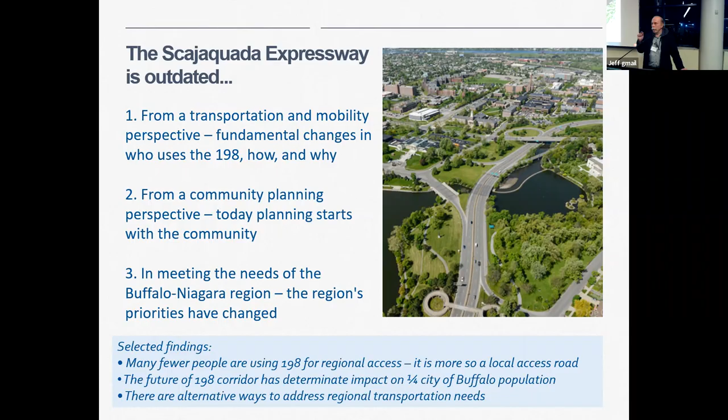And one of the things that Hal did—wherever Hal deserves a lot of credit for, I don't know if he claims it—but he's the one who came up with the idea that instead of looking at Buffalo as a region to develop the context for this planning, let's look at the area, the people impacted by the expressway, and use that as the primary focus site area for planning, and hence the invention of Region Central, which I promise none of you had heard of before Hal invented it, because it wasn't a term.

And he literally said, this is the place that should make the decision, partly because you will all take the larger region's needs into account. You all share the same place, but it is from this physical base that we should plan in the 2020s, because these are the lives that are impacted.

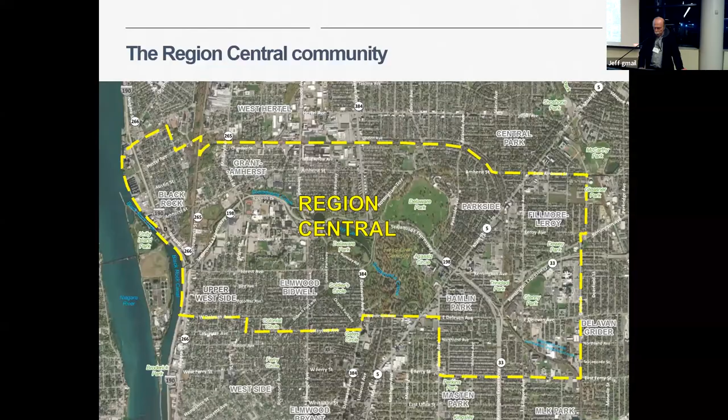Is this making sense? These are the people who decide I want to live here or not, which is what matters. So the process that many of you have been involved in for much longer than I have began with years to review the planning history of this place.

How should I say it—brings some frustration, because it basically ground to a halt for the right reasons. They couldn't make a decision because they didn't have the right alternative on the table yet, because they didn't have a process for getting to the right alternative. And that's not a criticism of anybody. It's because we learn as we go.

So people learned, and people like Hal developed a new process from a baseline analysis that really looked at Region Central, its needs and aspirations, engaging folks like you who have a terrific and very generous set of values. One of the things we observed quickly is that there are not conflicts among you as to what the priorities should be, which is very interesting.

You all tend to, and I hope I'm not overclaiming, share the same priorities for a more livable neighborhood, a more equitable Region Central in Buffalo, a place that nurtures economic opportunity as it's understood in the 21st century, when we have a knowledge economy that is what grows.

You are very interested in not just reclaiming the Olmsted legacy because it's something to be proud of, but because it was grounded in a wonderful way to enjoy and celebrate nature in the midst of a city. And it's been really inspiring to us to see the visceral desire to bring that back and have access to it and give everybody access to it.

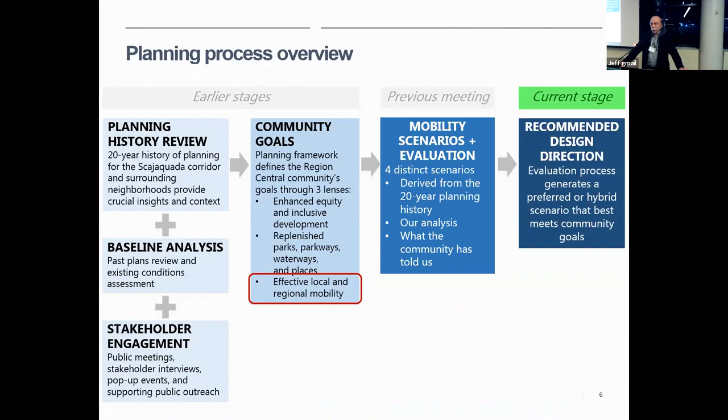So on that note, thank you so much for being here. Ask us any questions, we'll be gathering in front of boards you don't see yet afterwards. And when I come back in 20 years, I hope to see you all at yet another meeting celebrating the fact this is open, maybe in 5 years. Anyway, thank you very much.

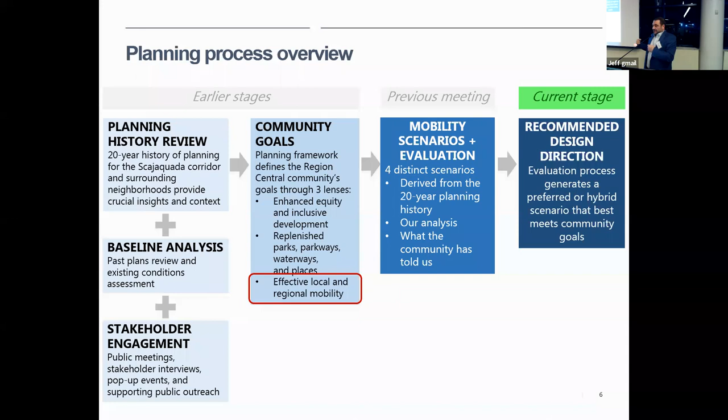So just to go over this, this is where we are. We're all the way at the end of this process where we're going to present to you the recommendation of your process, right? All of our work and interpretation of everything we've heard and seen, and what that boils down to. We've done much work in the beginning, review of all the work done before, analysis, heard from all of you, translated that into goals. What do you want to see? And then developed scenarios and tested them. I'm going to go through that a little bit and then where we are here today.

So if you were here in May, and many of you were, you may remember that we developed 4 scenarios and asked you to comment on them. Many of you also told us which ones you liked, and that's fine. We adapted those based on the feedback we heard. Those 4 scenarios represented a kind of range of outcomes. Our goal here is not a final design, it's a design approach. I'll explain that a little bit later.

But those 4 scenarios ranged from something that is the status quo, a corridor that looks much the same as it does today but better, all the way down to something like full removal, as if there was no road, no highway, no anything else, and it was replaced with parkland or something that looked more like what used to be there before they built the highway. These are the exact visuals we showed at that meeting before you all marked them up and commented on them. It again shows those approaches to the corridor, where there would be a road, intersections, ramps, new crossings, and what we might do with some of the parkland or things that would replace it.

But we presented all of those again. And by the way, if nobody said it, all of these slides are also going to be available online so people can go look at them. I can spend more time with them. So I'm not going to spend a lot of time reading the details of them here, just they're too rich for that kind of environment.

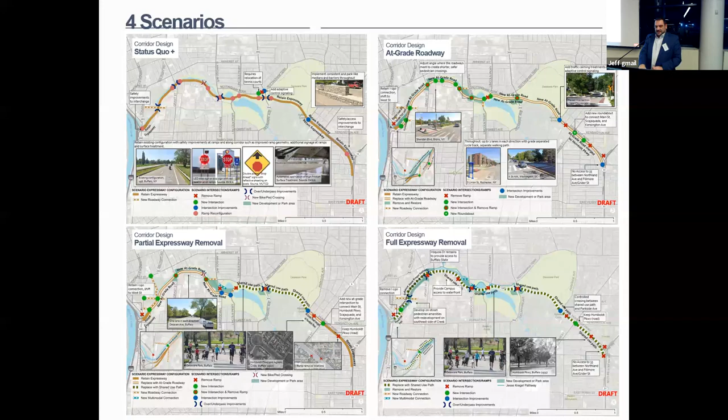Many of you commented on the specific scenarios that we were testing. You may not remember, but you also commented on these - these are the lenses, if you will, that we said.

These are the things that you care about. These are the things we heard from past processes and through this process, that you wanted a Scajaquada corridor and a Region Central that accomplished these things, right?

The second is replenished parks, parkways, waterways, and historic places. How much can we recreate what was here or make it better in today's context, not an 18-whatever context? And then the third is enhanced equity and inclusive development.

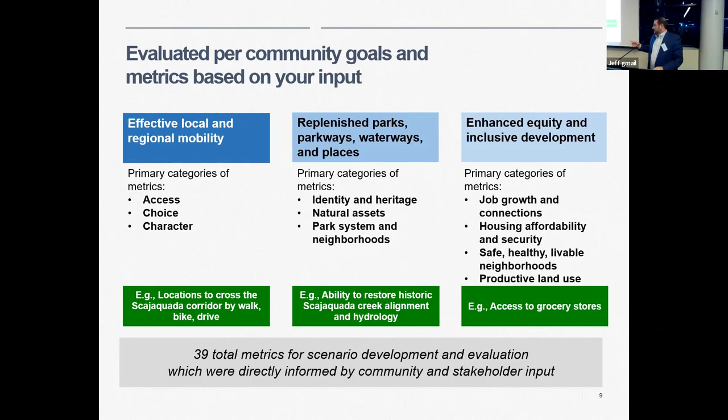Again, we translated all those big picture titles into specific goals and metrics. You all commented on those and we adapted them based on those meetings. We developed subcategories—believe it or not, 39 of them, total metrics for all of these. That's the work we've been doing since May as a full team, including the GBNRTC folks, taking each of those scenarios and developing them to a certain level of detail so that we could evaluate them against those goals and metrics.

Now, 4 scenarios, 39 metrics. If I tried to talk through all of them, we'd be here for 5 hours and you'd be running me off the stage, so we're not doing that tonight. All of that will be available. But what we tried to do as a result was take the best parts of each of the scenarios and combine them into what we're going to show you tonight—what we think is the recommended design direction.

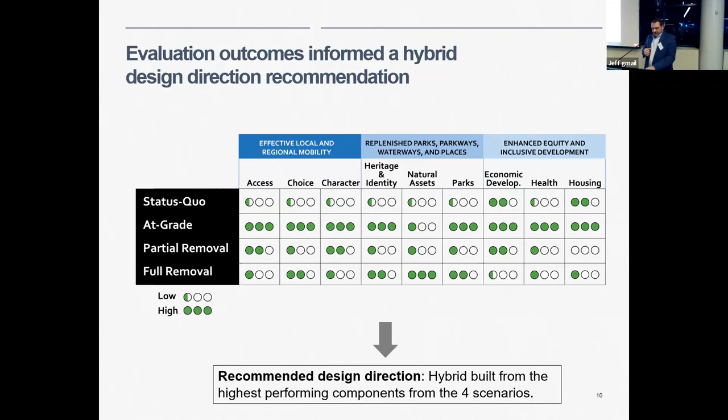Before we do the full reveal, I want to talk a little bit about what we think that does and what we tried to capture. So the recommended design through this process, what we're calling Scajaquada Parkway—name is up for debate—is similarly Olmsted Parkway inspired.

It has at least 1 lane in each direction with a potential sometimes for a carriage road, so there might be a through road and a separate road next to it within the right of way for certain segments. It has bike paths and sidewalks throughout. That was a big part of what we heard through the process—how much the current highway and creek actually divides neighborhoods. It acts as a barrier, and we proved it with a lot of data.

If anybody remembers the mobility guide and some of the stuff put online earlier, it really shows how, depending on where you lived, you did not go to the other side of the expressway. People just don't—the majority of people live their lives this way or this way, not across, in ways you don't even realize. Again, the recommended design here removes all the ramps. Even as it exists, many of those ramps we've shown you are substandard—they're short, the mergers are difficult.

They're safety hazards. I'll show you some examples of what this looks like. With 1 lane in each direction, all of the ramps are removed except for a few, and you'll be able to see some of the details that are kept for a specific purpose, replaced essentially with at-grade intersections.

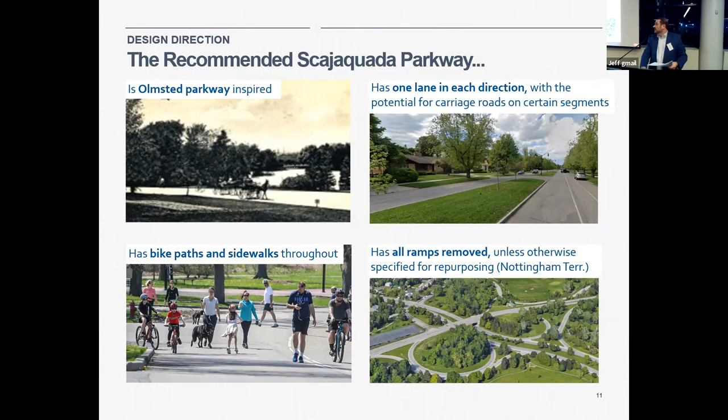And that's what it does from a public benefit standpoint. Again, having gone through all the metrics, we think the recommended parkway really enables restoration of parks, resources, and heritage assets—not all of them, not exactly the way it was, but the potential to recapture much of that, and in some ways do it in a way that works for today's world.

It creates safer, more direct and enjoyable connections—not just for people in cars, but for people walking, bicycling, and using public transportation. All of those were part of our analysis. They're part of the things you care about. They're part of the metrics.

Again, we think it enhances safety, health, and vibrancy of the surrounding neighborhoods by creating more and better ways to access the road, the creek, the park system, and the other side. As part of doing that, you're able to connect more residents to job opportunities and economic development, and find ways to reknit some of these neighborhoods back together. All right, that's enough build up.

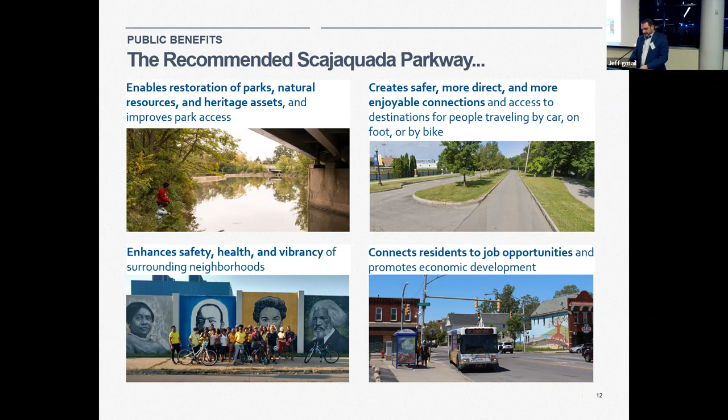So this is our recommendation as a result of that process. I'm not going to read every single thing that's on here. There'll be boards that are cleverly hidden for this moment, but as soon as this presentation is over, we'll put them up. You'll be able to walk up to them and ask questions.

So what we're showing from west to east is an at-grade roadway that is essentially one lane in each direction. It has the ability to have turn lanes and things like that, and more crossings, additional crossings. I'll show you some cross sections of what we think can replace where the expressway is today on the next couple of slides.

We're in some cases removing interchanges, and in some cases, in order to accomplish this, we've stress tested this a number of times. There are places where we're recommending additional on or off ramps, because essentially what we're doing is distributing all of the activity in a different way. So there are going to be places with better pedestrian activity, better bicycle activity, and other places for cars to go.

If anybody remembers, one of the things we looked at earlier is that actually very few people ride in cars from one end to the other, right? It's less than 20% in one direction, less than 10% in the other direction. Most folks even on the Scajaquada Expressway as it exists today are really going somewhere in the neighborhood. We're using this as a kind of local distributor.

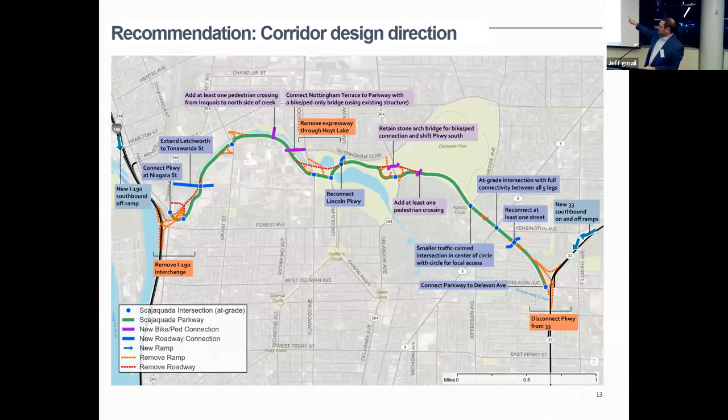And then when I say the main segment can float, I mean this cross section won't always look like this. At some places, the road itself may want to be more to the north or more to the south, depending on where you are. And you can see, just to go back on this one, kind of where that main road would be - so we're talking about a cross section that floats within that.

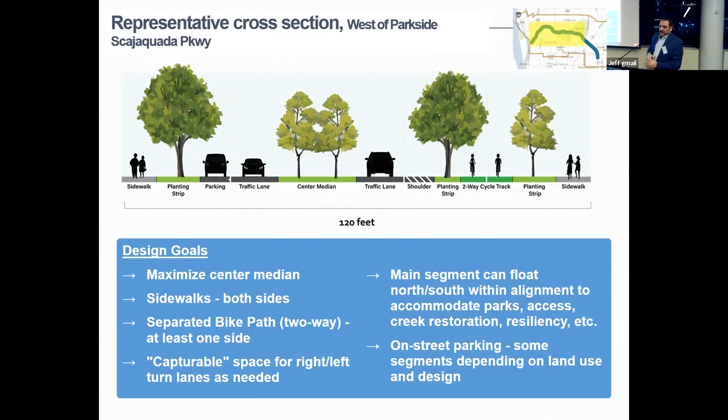This, by the way, is the section of the Scajaquada Parkway that is west of Parkside Avenue. We have a little graphic in the top right, a little locus map that shows what that recommendation is. East of Parkside, which is the traditional Humboldt Parkway section, it's actually even wider - there's a wider cross section there.

You're in a cut for part of that. We're talking about that would be raised up. The intersections would be at grade. You'd have a center road, which would be essentially the through road there, and then calling it a carriage road along either side. That's more along the frontage of where the houses are, where those residences are, where any of the other land uses are - so that would be the more local access. And then within the middle, you'd have that through lane. You'd preserve the parking on the carriage roads.

Within the center road, you would not have that. You'd have planting strips, you'd have room for bike paths.

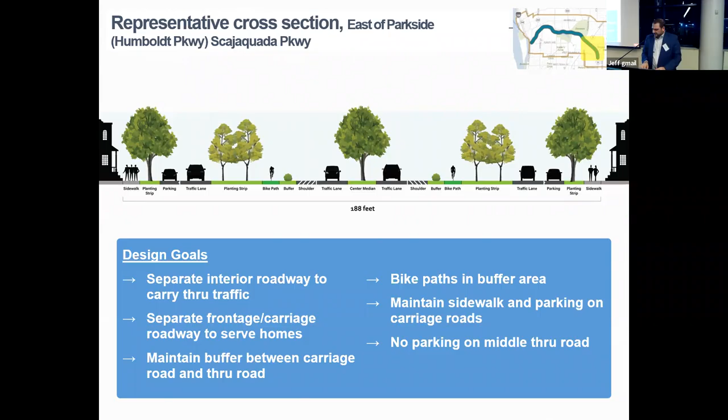The specifics of exactly what goes on any of those strips or how that looks are all things for the next process. Because we're looking at a much larger area, talking about all the things that need to happen in Region Central, each of the scenarios we presented back in May had their own list of other supporting elements that went along with that—things that should happen in order for an at-grade road, a full removal, a partial removal, or the status quo.

So these are new connections, transit upgrades, improvements to any of the surrounding streets within Region Central. These are some of the things that were considered.

We also evaluated each of those and chose the supporting elements that best accomplish those goals within the hybrid recommendation that we're showing here today.

I know I'm throwing a lot of information at folks, but we tried to make sure each of these scenarios or supporting elements chosen looked at an associated improvement of almost 14 miles of other Region Central roads, building them for the future while protecting residential neighborhoods and building the kinds of things that are going to help folks get around Region Central and beyond.

And we will also have boards that show what these are. There's some really critical elements here that we're showing on this slide about key supporting elements.

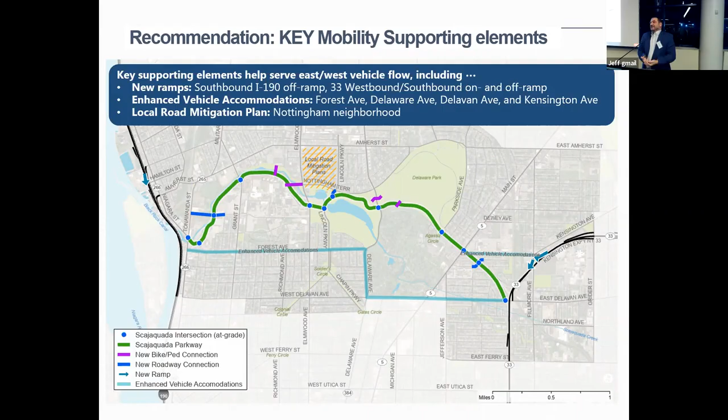And then this is the full list of the supporting elements that are part of this recommended scenario here. Again, you see improved bike corridors, multimodal corridors, which means more designing those streets as complete streets. So we might add bike facilities, we might add transit, we might add sidewalks—a little bit of everything, a much more balanced approach to each of them.

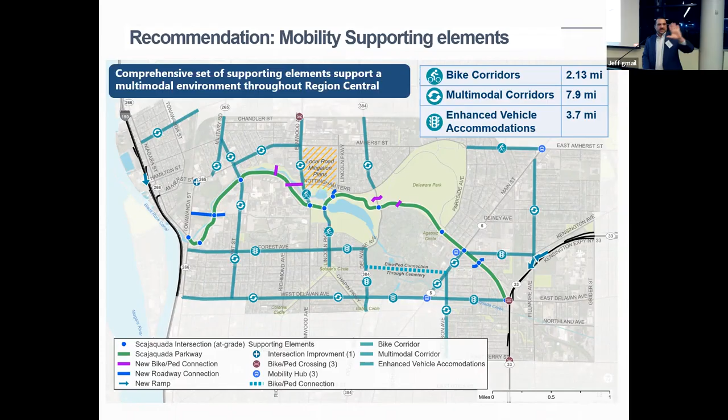And then the places where we're talking about enhanced vehicle accommodations—there's much detail here. Again, these are all going to be online, and they'll be on boards here for folks to take a look at. Because we know there's so much information and many of you are going to want to zero in on where you live or where you go to school or anything else within the individual neighborhoods, we did a few blow-ups of each of these areas.

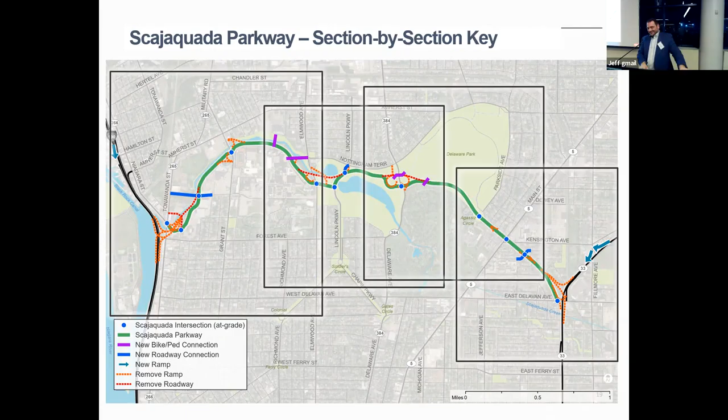Maybe blow-ups isn't the right word—some key maps that show the areas in much more detail. I'm not asking anybody to read these on the slide, that's why they will be on boards. But we also tried to point out on each of these—and there's four of them—this is the area by Buff State.

We tried to show the actual benefits of this scenario, not just as a whole, but in individual locations for mobility, for parks, heritage, and natural resources, and for inclusive development benefits and equity. Because this is what we mean, right? This is the kind of work we've done with your help throughout this process to say, when this scored highly for this reason in this place, that's why—that's what we meant by it, that's what you meant by it.

That's our interpretation of it. So again, not asking anybody to read the words here, but to go to the boards on the side, to spend some time online after this, even after you think about it, and look at things in a little bit more detail and talk about the individual components for each of these.

So again, this is the Buff State portion. You can see some of the additional connections there. There's a new road where that E is, right? That would be a new connection across to Tonawanda. That's a really isolated area that is kind of derelict right now and creates a huge opportunity for almost anything that the city or the region wants to see there.

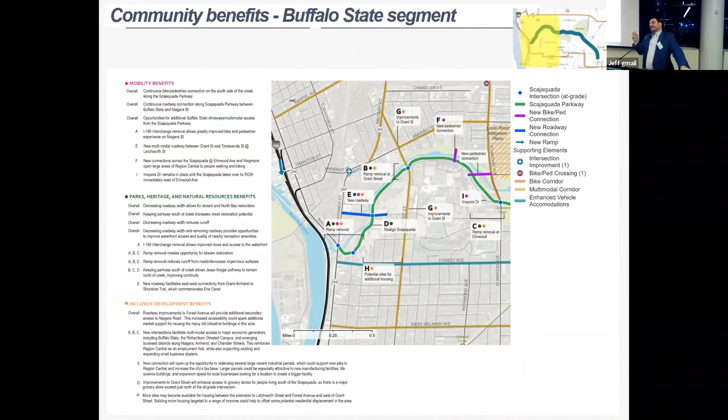Connects that to Buff State. And you can see when you get into this at a granular level, how those additional connections take place and what they might mean for all the sorts of things that we're trying to achieve here.

Similarly for the Hoyt Lake portion, there's a lot of thought that goes into where the road would go and how that would align. Again, a new connection just for pedestrians at the end of Nottingham Terrace there. Improvements to some of those connections directly abutting. So it's not just we're fixing the corridor, but thinking about how do you connect from the neighborhood to the corridor. Those are big parts of what we're showing here.

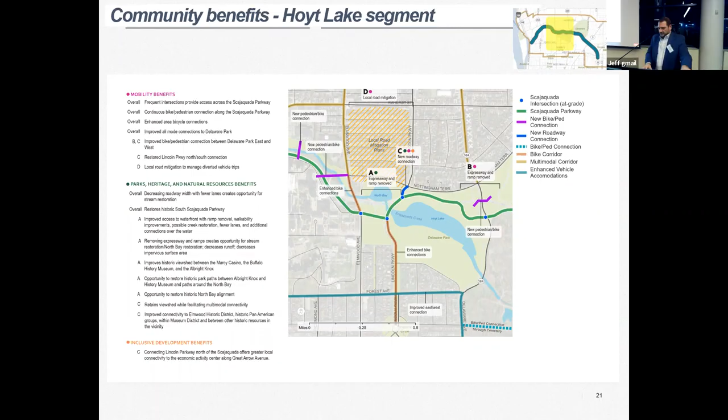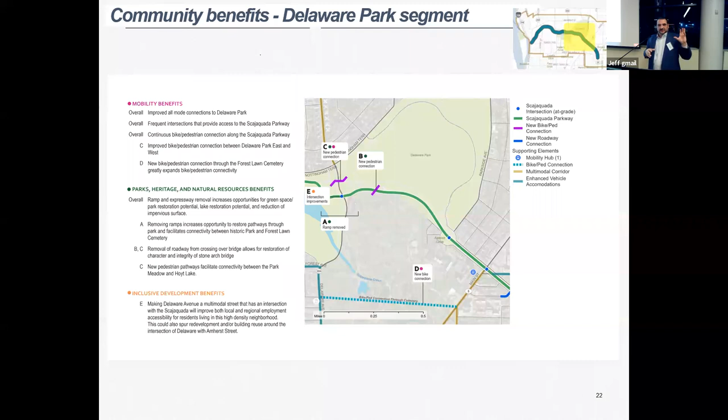Again, by Delaware Park, including a new bike ped connection in the south there. And some of the other improvements here, you can see the ramp removals. And again, I encourage you all to come ask us questions and look at the boards and spend some time looking at the individual components.

And then the last section by Humboldt Parkway, you can see the removal of the ramp connection from the Kensington to Humboldt Parkway and to the Scajaquada Expressway. That would all be replaced at grade, at Delavan. And you see a new westbound ramp where that D is. So if you're coming south, kind of from the airport, a way that you would connect over into the corridor.

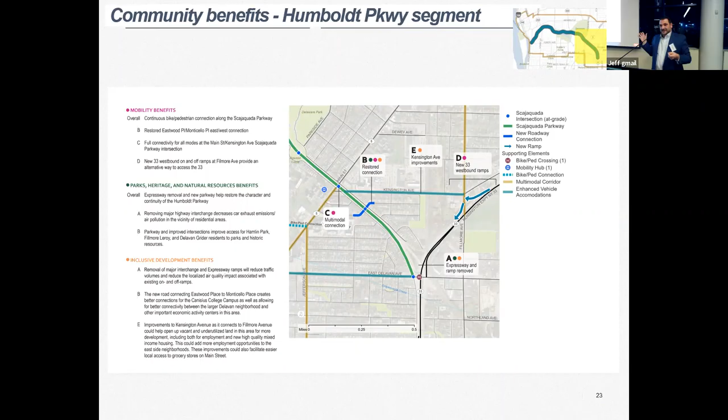So we've done our best to translate all of the things that you were looking for, all the various components of our analysis into this recommendation. So please come up to us, ask questions, think about it. Because there's a lot of thought that's gone into each and every single thing that you see on each of these maps.

David, I promised that we would hear from you again, and I think this is the time where I think we just have a couple more slides and then we'll be released to come talk to the boards and meet any of us with these name tags and ask us really specific questions. David, I'm trying to stall till you get up here.

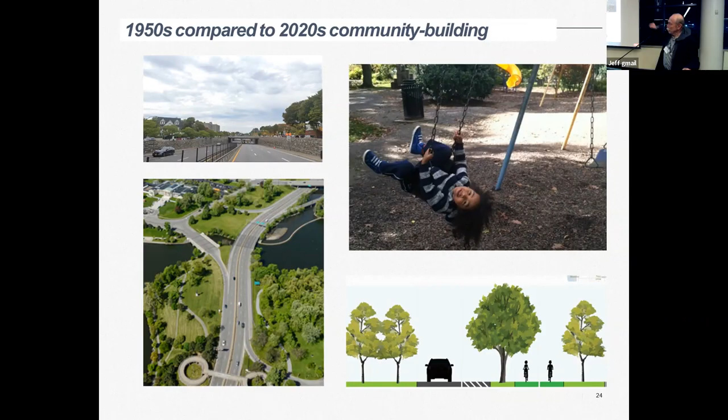On that note, you're not really hearing from me, you're hearing from Hal. This process, Hal was kind enough to hire us as consultants and our great sub-consultant colleagues. But this process now belongs to him and to you. And so bond together and go forth and do great things. Thank you.

All right, last slide, let me go quickly here. So since this is a non-traditional transportation process, everybody asks me how are we actually going to get this done.

Work through the design process also, and I think we'll get a better result from everybody participating that can.